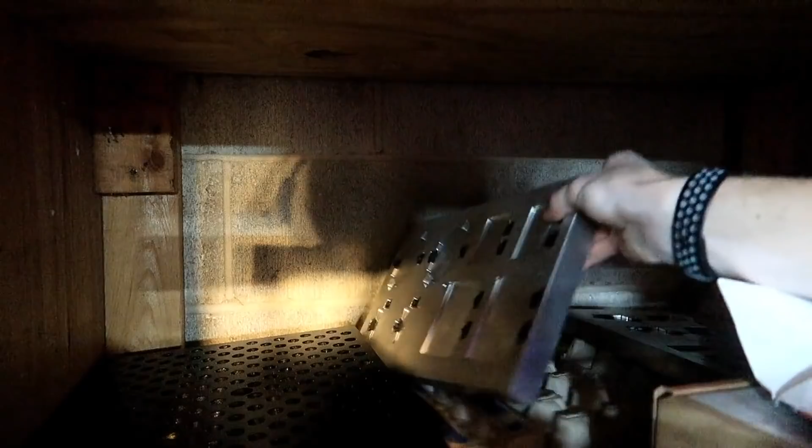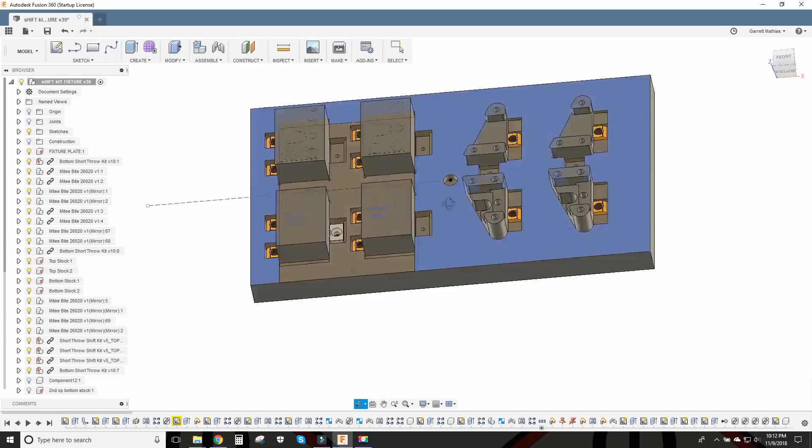So this isn't the same fixture you just saw in the video. This is the fixture for the Fiesta ST, and the one you saw was for a Focus ST. Same concept though. So first off, I really didn't need to use a fixture plate for this product just because the demand wasn't very high when I started making this thing. It was good experience to make this fixture plate, but I didn't really need to. Soft jaws would have sufficed for this, making custom soft jaws instead of this big fixture plate. No big deal though, good experience.

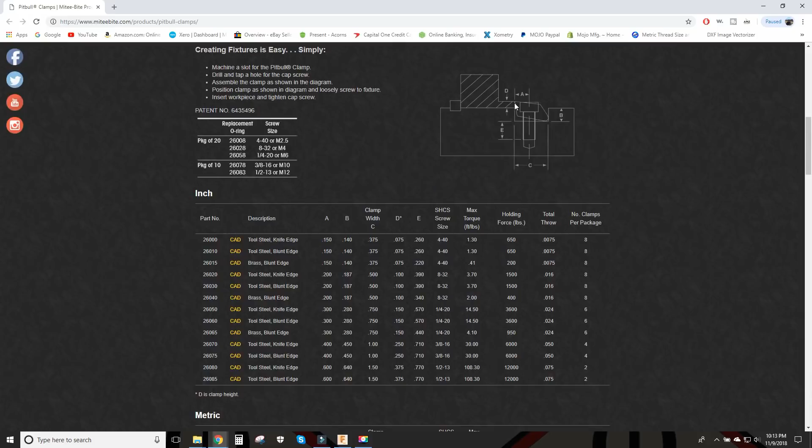So to start off with, I needed to hold these raw pieces of aluminum stock, and I used this Mitee-Bite product called a Pitbull. These Pitbull clamps basically work just like this, and they wedge in this little pocket right here, and this little knife edge right here pushes into the material and holds it down.

So I use these 26020 tool steel knife edge, and basically when you make these, they tell you everything you need to know about how to machine the pocket for it. This C dimension here, you come over here and it's a 1/2 inch pocket, and it tells you where the bolt location is. It's 0.2 away from this side of the pocket, and it tells you, with this 1/2 inch pocket, which is B, 0.187 deep,

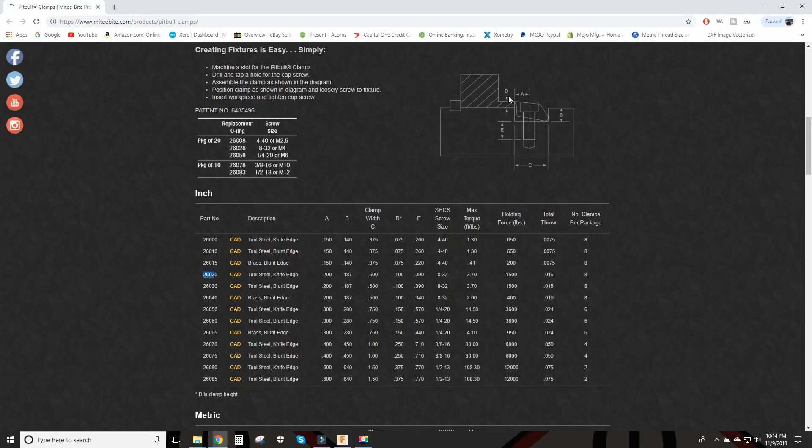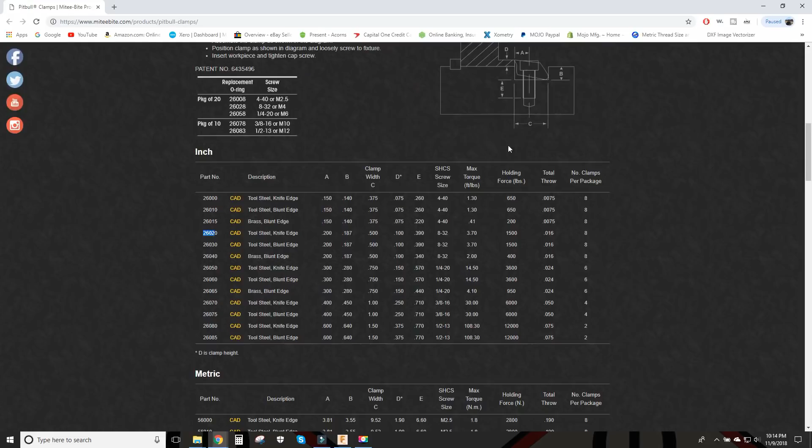how much you're going to be clamping onto the piece of material, which is this D dimension. So Mitee-Bite really makes it easy for you when you want to design fixtures, because they tell you everything you need to know basically. Well, they should for how much these things cost. You have to go through a distributor to buy these, and Mitee-Bite sells 8 in a package for $110. MSC Industrial does a really good job. They get them to you really fast, and they just work. Regardless of how expensive they are, they work very well.

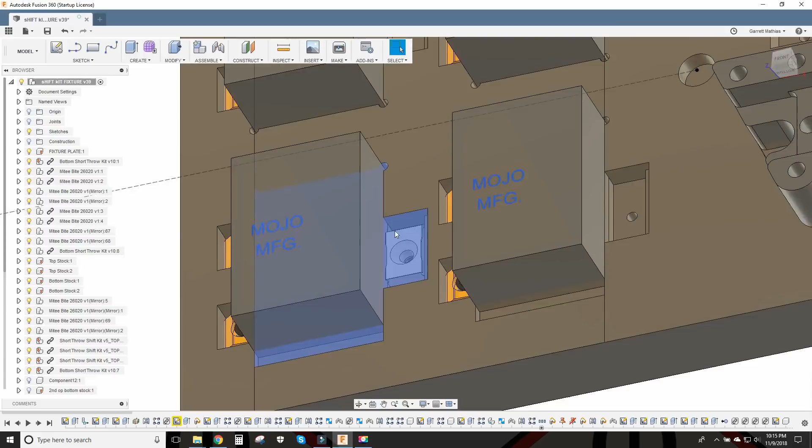So in the original, well, they're still not this way, I don't have these clamps right here. I basically just wedge these against the material and push it against the aluminum pocket that was machined in the fixture plate itself. I knew it would wear out over time, so I figured I'd put these, they're called Talon Grip clamps from Mitee-Bite as well.

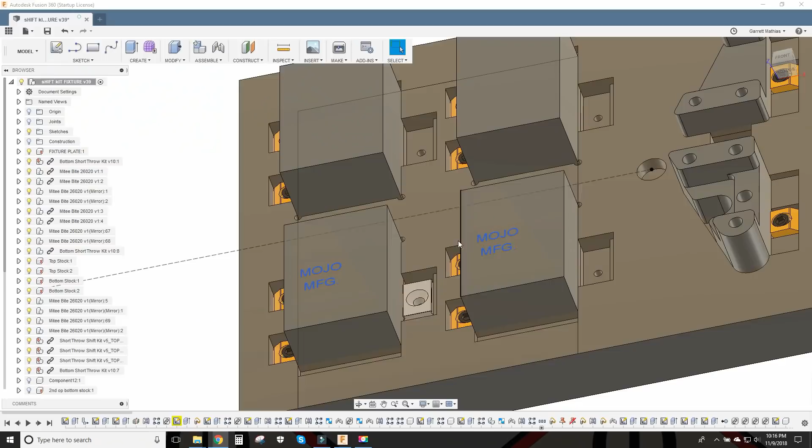They're just a stationary clamp, and they just have a serrated edge or a knife edge, just like the Pitbull clamp did. I use these in my Carve Smart jaws for my vise, these 32050, and once again they tell you everything you need to know about how to machine the pocket to use these things. Super beneficial. So that was my thought later on after this had gotten worn out enough.

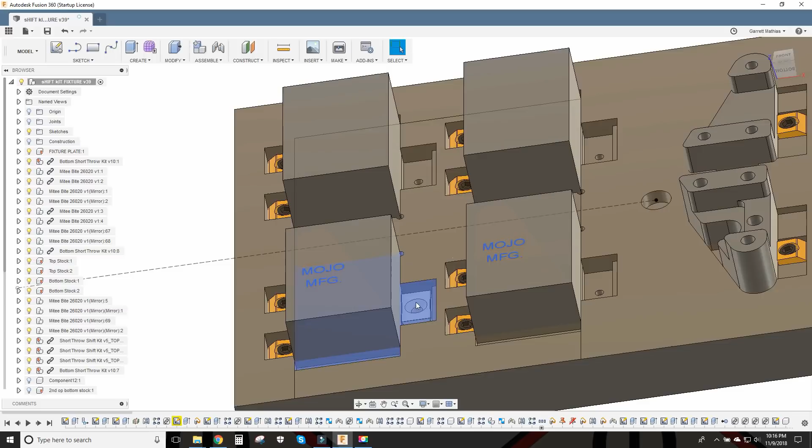So when you loosen these Pitbull clamps up, they're pretty flexible, and you can easily slide in a new piece of material, then clamp them down, and the knife edge of the Pitbull clamp pushes into the material, and then this would push into the material as well once you tighten those down. That was my thought, at least. I never got that far. I actually stopped machining these because, once again, the demand was fairly low.

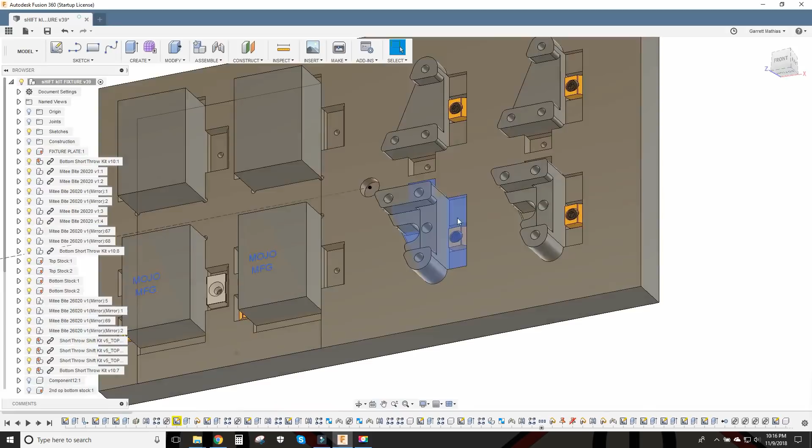Now going to the finish side over here, after I machine the first operation right here, flip them over and finish them off, basically just deck off this top and make these little pockets here. But I knew this wasn't a cosmetic part. Once you put it on top of the transmission, you never see it again. However, people still like to see a nice part once it gets delivered to them. I used these Pitbull clamps once again, but this was on a finished side of the part.

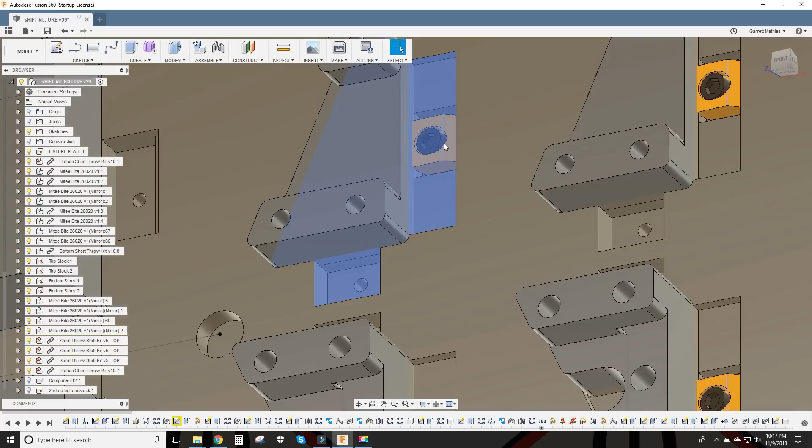So you see this little dimple, it's almost like a scratch mark, and I didn't think anything of it. I mean, once again, it's not a cosmetic part. It didn't hurt the functionality, but I could have done better.

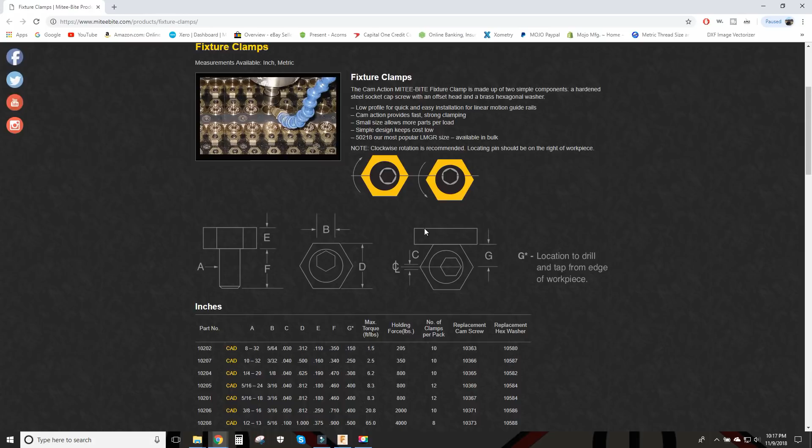Mitee-Bite also makes these other fixture clamps, and they work on like a cam action bolt. And once you tighten them down, one of the sides of this hexagon pushes into the side of the part, holding it down. There's a lot less holding force with these, but you can counter that with taking a lot lighter cut, and it doesn't make any mark onto your part. These are just a flat edge, as you can see here, just a straight flat edge. So these really would have worked a lot better.

And once again, I probably would have got this 10207 right here, 10-32 bolt, and they're 1/2 inch wide basically, so from flat to flat they're 1/2 inch, and I probably would have gotten something like that instead of those Pitbull clamps to hold this down right here, and then that would have stopped the little mark on the part. But hindsight is always 20/20.

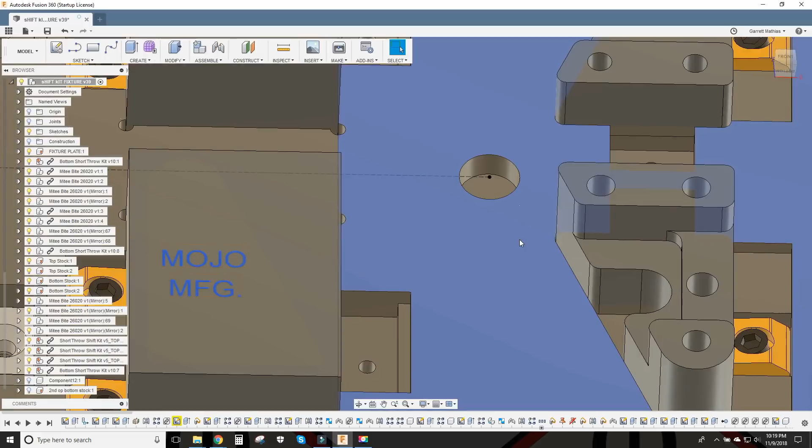Aside from that, on every fixture that I ever made, I found the center of this whole plate, and then I always made this little hole right here. This hole is 1/2 inch in diameter and 1/4 inch deep. And I always made the origin point in the center at the bottom of that hole. That was basically the start of machining this entire plate. So I take every cut based off the center of the bottom of that hole right there.

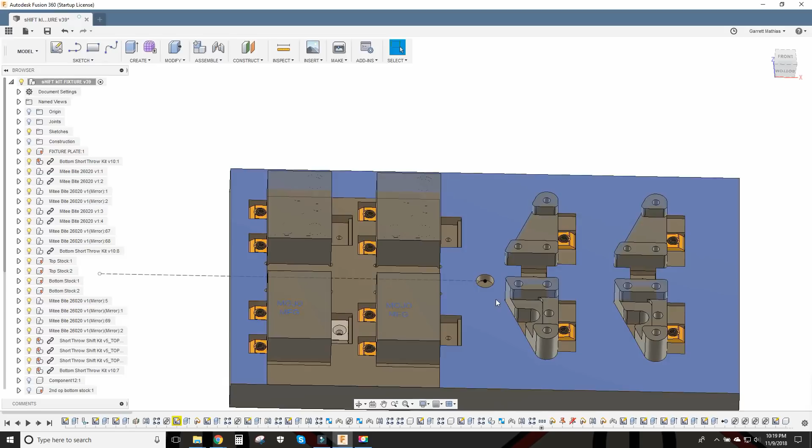It just made it really easy to make things, just with that one hole. I don't know, it just seems super simple. I am very certain that's just how things are done in the machining world. You have an easy origin point like that.

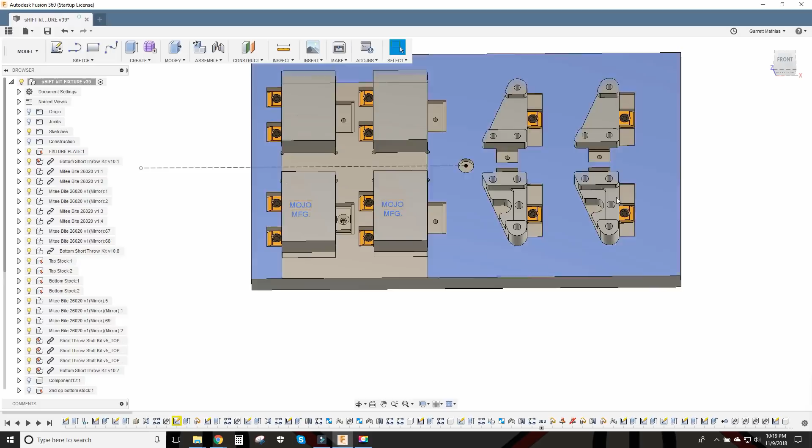And I had the Saunders Machine Works fixture plate. Actually, I still do. I don't use it a whole lot anymore. But I put 2 dowel pins in the front of that fixture plate, and then I push this whole fixture plate against the dowel pins in the Saunders Machine Works fixture plate, and then I tightened everything down with strap clamps.

Now, I could have made counterbore holes in these to line up perfectly with the fixture plate, but I decided not to do that either. It was just easier to do it with strap clamps, even though I hate them very much.

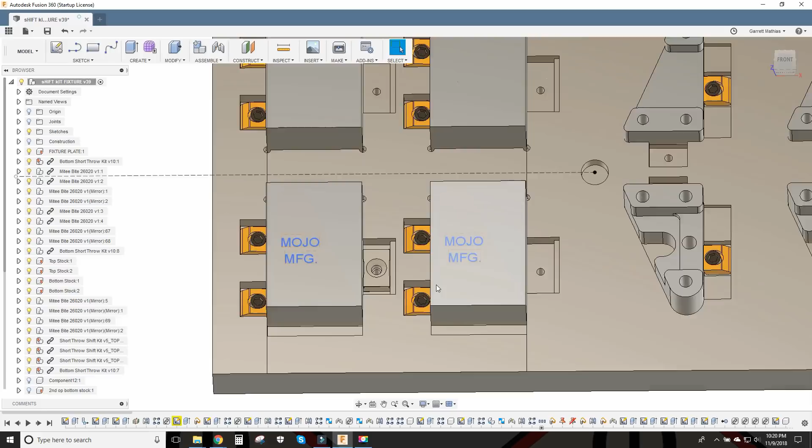One thing I forgot to bring up was I could have used locating rails, which is another Mitee-Bite product. Instead of wedging up against the side of this aluminum pocket right here for these raw pieces of stock, I could have used these locating rails instead. Just machine a channel and put these hardened steel, well, maybe they're not hardened, just low carbon steel. Doesn't matter. They would have worn a lot less than just this aluminum piece. But that was the other thought, instead of using this Talon grip clamp.

So there's many ways you could have done this, and this was just the easiest way that I came up with right off the bat with my rookie status in the machining world. Well, it still is rookie status, but it was the first thing that I came up with, and it was the easiest way I knew how to do it. So that's how I did it.

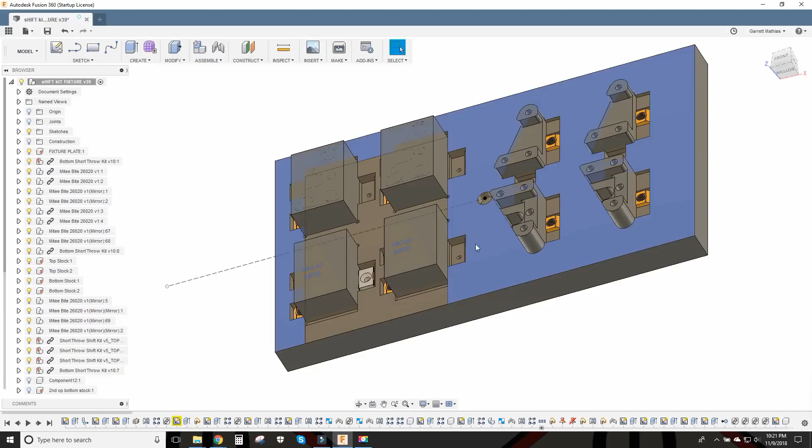Like I said, it was a super good learning process, and I don't regret doing it. But I really could have used just soft jaws, and that would have been just as easy. So, oh well, I think that's it for now.